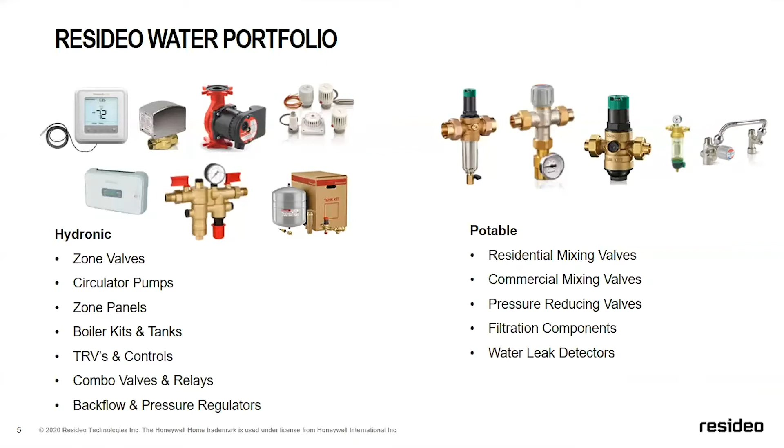We have boiler trim kits, which makes installation of the boilers simplified, TRV controls, and combo valve and relays, boiler feed valves and backflow preventer regulators. And on the potable side of things, we have mixing valves, commercial size mixing valves, pressure reducing valves, filtration components, and water leak detectors. So looking a little bit deeper in our potable portfolio,

At the top you'll see our AM1 series mixing valve, which is a three-way mixing valve that has a patented Teflon coating on it. This helps with longevity, and if you have harder water in your system, this prevents any premature breakdowns. We have an AMX high flow series mixing valve. You will see this on an indirect water heater because they consist of higher flows.

MX commercial style mixing valve, which goes up to 3-inch flanged. You can also use this as a diverting valve in chilled water systems. This also comes prepared with a recirc loop in case you have a recirculation system. UMV 500, which is an undersink mixing valve. This has 3/8 ports. You can either use it as a 4-port mixing valve or a 3-port mixing valve, depending on the situation of your faucet.

And then we have a sediment filter with an optional automatic blowdown option. We have wireless Wi-Fi water leak detectors that come prepared with a 4-foot rope, but you can also extend that rope all the way up to 800 feet. We have a water leak alert that attaches to your water heater, and then we have universal replacement gas valves for OEMs like Bradford White, A.O. Smith, and Rheem.

And up at the top, we also have a mixing valve that is industry known as the tank booster. If you put this on a tank style water heater, you can get potentially 35% more of the tank capacity. This also comes with a pre-tempered port in case you have a washdown station, and a recirc port if you have a recirculation system within the home. And then on the cold side, you have a separate port for either a temperature gauge or a pressure gauge so you can monitor your incoming pressure.

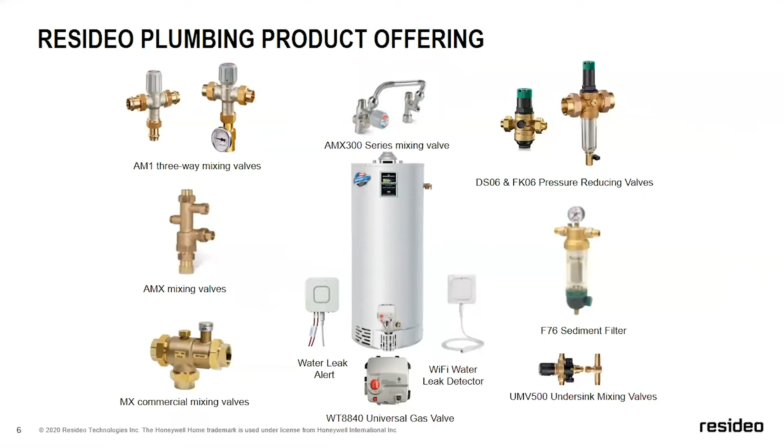And then up at the top, we have our DS06 and our FK06 pressure reducing valves. And that's what we're going to be doing a deep dive on today. So we're going to be talking about the importance of a PRV and the features and benefits of the DS06 and what makes the FK06 special, because it does come with a 50 micron stainless steel filter.

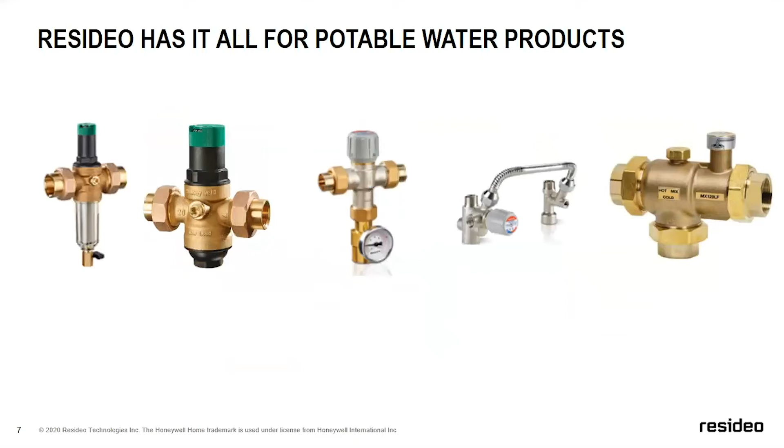So let's start out by talking about what is a pressure reducing valve. A pressure reducing valve simply takes higher water pressure from the street and reduces it down to a manageable, safe pressure to prevent any fixtures like toilets, faucets, laundry machines, and any other potable water fixtures within a house from failing prematurely. If the house street pressure is coming in at 80 psi or above, it is code that you need to install a pressure reducing valve to protect these parts.

And also, if you shut down your faucet and you notice a banging within your water pipes, also known as water hammer, this is a high indication of high water pressure within your home. So I would recommend calling a licensed plumber to either check the PRV that you currently have in line or install one.

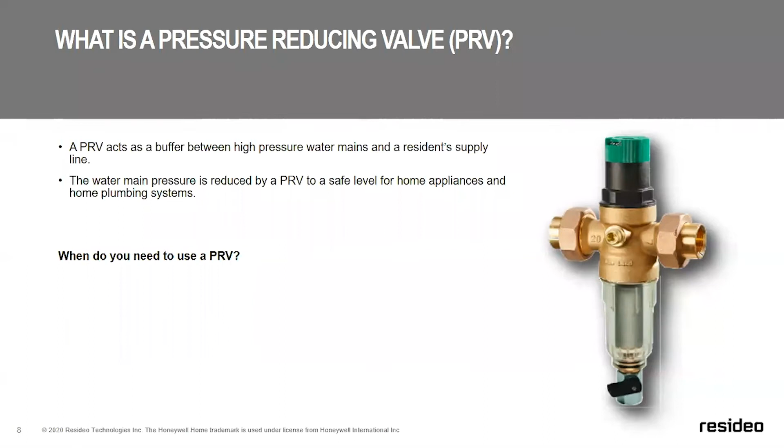So here you see the DS06 and the VF06. The VF06 is our closed loop pressure reducing valve made for hydronic systems. There's a significant difference between the two, starting out with cost. The cost of the DS06 is a little bit higher because of the parts that go into building one of these, and they are also lead free. The rangeability of the DS06 goes between 25 and 90 psi, and the VF06, which is made for boiler systems, goes from 8 to 50 psi.

And then the max input pressure for the DS06 is 250 pounds on the inlet side, and on the VF06 it is a max of 150 pounds. So you can see a significant difference between the two. So if you are looking at a pressure reducing valve on a closed loop boiler system, make sure you're picking the correct pressure reducing valve. And I would also like to note that they both have an output gauge port. They're just in a different location.

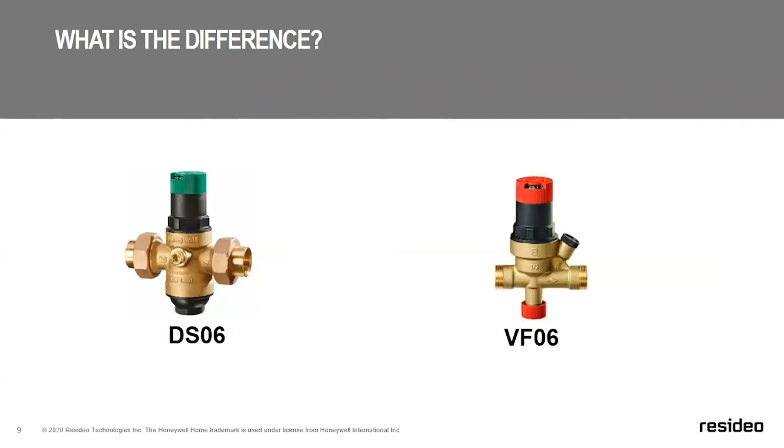So talking about a potable system, what makes high pressure? Well, the higher the elevation of your municipal water tower, the higher the street pressure is. Also, sometimes if your city is above the water table, your municipality will install a pump station so you can get the correct pressure up into your city. Now this can create inconsistencies with your water pressure.

So not only does the DS06 reduce the amount of pressure to make sure it's a safe, manageable operating pressure, it also regulates inconsistent pressure going in. So for example, if you are opening a faucet and then your son or daughter, or whoever else is in the house, opens up a faucet on the other side, and all of a sudden you see a reduction in pressure on that specific faucet, that's a huge swing.

And then also sometimes if you just randomly open up a faucet and you're washing your hands by yourself and you see a significant reduction and no one else is using any other fixtures in the house, that is a clear indication of inconsistent incoming water pressure.

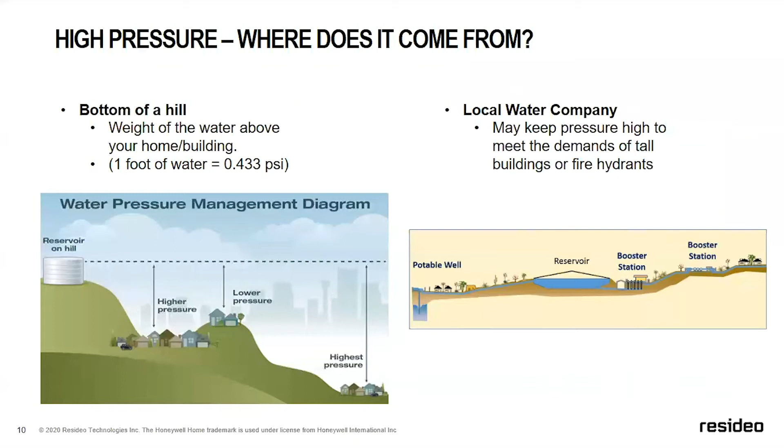So what does our PRV do? Well, like I said before, it takes street pressure, which is high street pressure, 80 psi or above, and inconsistent water pressure, and it reduces it down to a manageable pressure, down to 60 psi. This prevents any kind of premature failures on washing machines, dishwashers, spigots, and any other water fixtures in the house.

So the speed of water flow from the open tap is determined by the amount of pressure in the system at that time. The higher the water pressure, the stronger the water force. Water pressure beyond normal requirements for fixtures and appliances can cause damage. So again, plumbing code does require that you install a PRV if your incoming water pressure meets or exceeds 80 psi.

So we're talking about premature damage on fixtures and other things in that aspect. But I also want to mention that installing a PRV helps to support water conservation. Installing a water PRV could save between 30,000 and 40,000 gallons of water a year. This could equate to hundreds of dollars a year spent in your water usage.

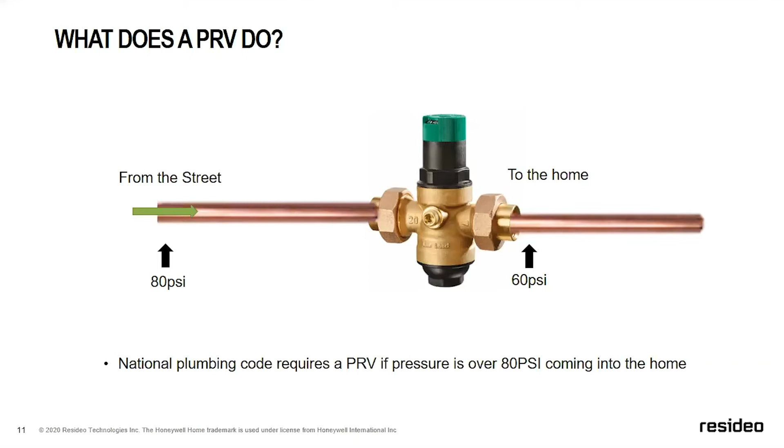So how does that pressure reducing valve work? It's a self-contained pressure reducing valve with a counteracting spring based on the incoming pressure. When you set the desired output pressure, the spring within the bonnet will compress downwards onto a diaphragm cartridge. This restricts the incoming water, slowing it down to a safe, manageable water pressure. And this will also support the amount of water going into the house.

So if you have fixtures that add up to, let's just say, for example, 45 gallons per minute, if you add up all your fixtures, when you reduce that PSI, you are allowing a certain amount of gallons per minute going into the home, and you're supporting water conservation, and you're not overusing the water.

If you have inconsistent water pressure, the spring will automatically compress or decompress, holding the diaphragm in place to maintain the outlet pressure. So that's how the valve actually maintains swings in your incoming pressure, so that when you set that spring, that pressure that you're setting, it will know to move up or down based on the incoming flow.

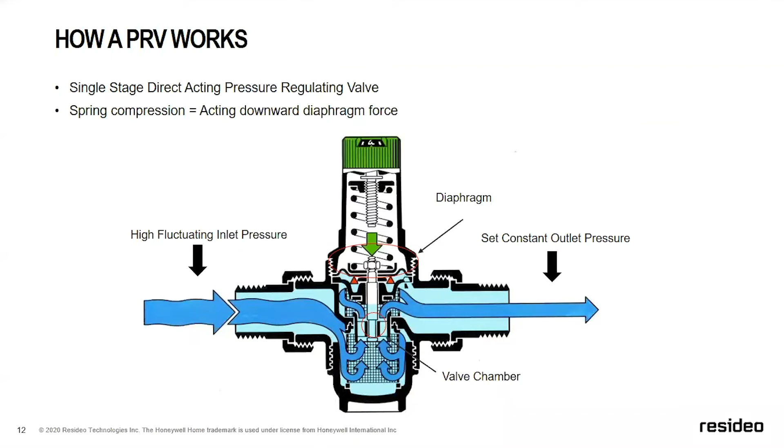So where would you normally see a PRV installed? The installation of a PRV should be after the water main shutoff and after the water meter, but before any fixtures, including mechanical equipment, including a boiler system. However, the irrigation system sometimes could be piped before it, but a lot of times it'll have its own PRV and testable check valve assembly in the case of sudden loss of pressure.

So the DS06 can be installed both vertically and horizontally, but I would also like to point out that we do have a gauge port on either side of it. So if you're using that gauge port, make sure you have access to it so you can read the downstream pressure, or the outgoing pressure of the valve. The FK06, on the other hand, can be installed horizontally. This is because you want maximum filter performance, and you want to make sure you can get to that filter to either blow it down, replace it, or clean it if need be.

So moving on a little bit deeper in the installation orientation. In the instance that an expansion tank is installed on a water heater, please be sure to check that the air pressure within that expansion tank matches the outgoing set pressure of your PRV. Also, check to make sure that a check valve is installed for forcing the thermal expansion from the tank back into the diaphragm of the expansion tank. We do not want that thermal temperature water going back to the DS06 or the FK06.

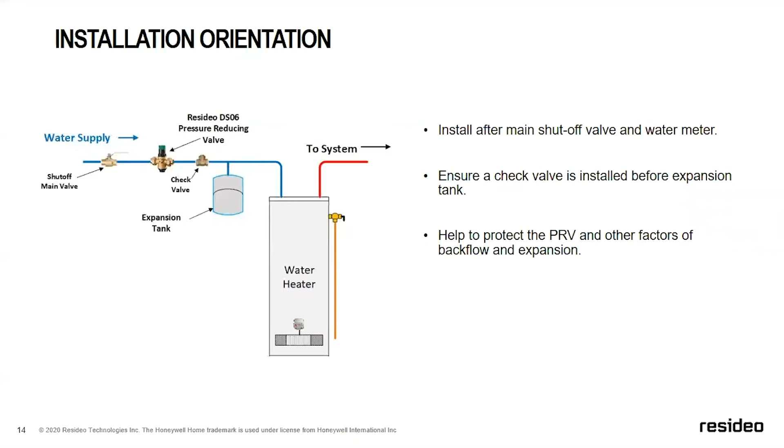So here is our two residential light commercial lineup PRVs. They're both dial set, and they're also easily rebuildable, so you can access the inner workings of this valve in line, assuming that there are isolation valves on either side. And then we also have the FK06 that comes with a unique 50 micron stainless steel filter that can be removed and cleaned, or you could just blow it down if need be.

So looking at this picture here, this is a broken down image of what it takes to build and what's inside of our DS06. And obviously the FK06 is very similar to this other than having the filter at the bottom. So at the top, you'll see the dust cap that comes shipped with the DS06. This is a tamper resistant valve, and this is adding to anybody going in and messing with the actual PRV. So it's a black cap, sits right on top of the dial knob, and then below that is the locking screw.

So this screw is significant because when you are actually commissioning or testing the valve, you're going to want to loosen up that screw, and that will release the dial ring so you can make your adjustments downstream. So when you're done making your adjustments, please tighten up that screw so it locks it in place. So there's two ways you can get this valve to be tamper-free or tamper-resistant.

And then going below that, we have the bonnet, which protects the spindle. And so when you're spinning the adjustment, that spindle makes the adjustments against the spring, pushing down the washer, which is essentially adjusting the cartridge, which is a wet cartridge. So you can see what it takes to build this PRV as strong as it is, and this is a quality product.

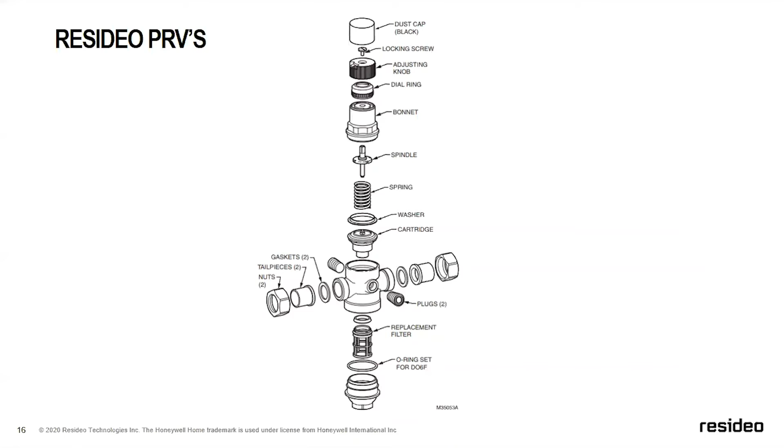So like the DS06 and the FK06, we simplified by taking 14 serviceable parts and building it into one affordable, easy to replace cartridge. So I would always recommend when you're installing one of these, make sure you have isolation valves installed, because you're not going to want to take this out and replace it. You just take the bonnet off, remove that cartridge, and then swap it out. And I would also like to point out that this is a stainless steel cartridge. So again, if you have harder water, this will withstand the conditions.

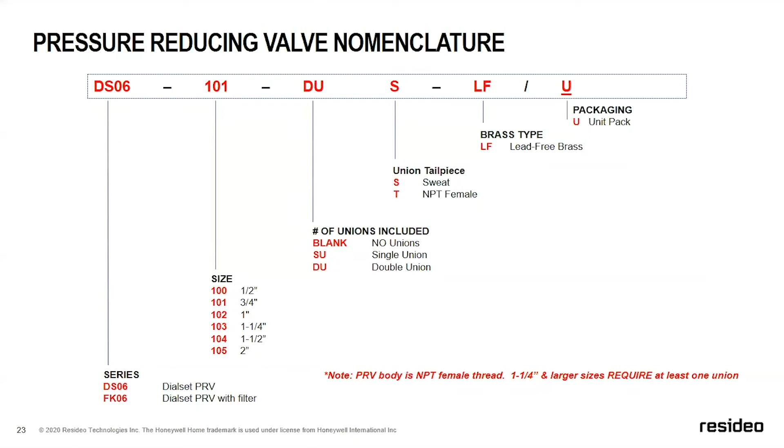And then the last letter is either S or T. S means sweat, and T means NPT female. And then LF is obviously lead free, and then U is unit pack. So here's a snapshot of what the nomenclature looks like for the FK06. Pretty much the same other than the FK, but the size offering is a little bit different, so you might want to make a note of that. We do offer it between 3/4 and 1.25 inches.

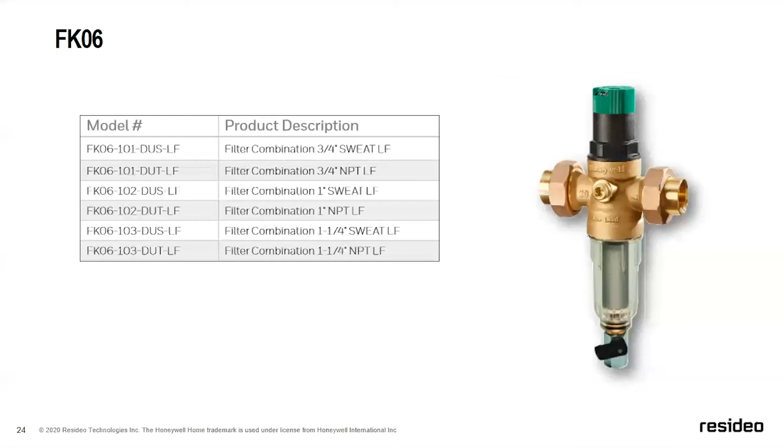Okay, so why use the Resideo PRV? Well, we have an easy to read downstream pressure gauge, so it simplifies setting it up. Traditionally, what you would need to do is put a downstream pressure gauge on either a hose bib or a laundry sink to test or commission, whereas all we need to do is loosen up the screw on the top, set that number to whatever the desired downstream pressure is, screw that screw back down, and then you're all set. So the adjustment is very simple.

We have a 1/4 inch NPT downstream pressure port on either side of the valve. So once you install that pressure gauge, you can easily monitor the operation of this valve. So let's say you get a call from your homeowner that says, I have either water hammer, I have inconsistent water pressure, or anything that could be a nuisance call. You go to the call, you already have your pressure gauge there. You don't have to add a hose gauge on your hose bib. It's right there for you. So simplified service, simplified testing, and simplified setup.

But then also, assuming that there's isolation valves installed on either side of the valve, you don't actually have to take the valve out to rebuild it. You can access all the cartridges, the springs, and all the serviceable items from the top, and then you can also get the filter from the bottom. And I also like to say that you can upgrade the DS06 to an FK06 by removing that bottom cup and then putting in the filter bowl assembly on the bottom. So that's a really nice feature for service guys that have service contracts for customers that have a lot of dirt and silt within their water line.

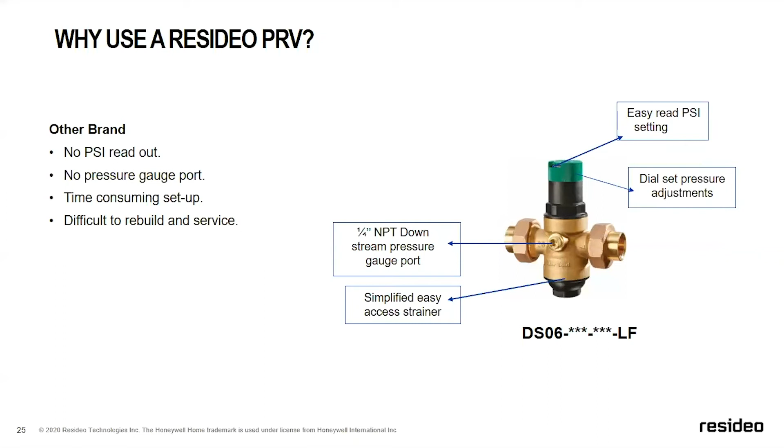And again, what makes the DS06 or rather the FK06 special? Well, again, the stainless steel filter, you can add it to a DS06. This adds protection to tankless water heaters, faucet aerators, water heaters. It'll prevent that silt buildup on the bottom of the water heater and other water components that could be affected by heavy dirt and debris.

And there's a blowdown option on the filter kit, and also you can remove it and clean it. So it's a really nice upgraded version of the DS06 that has all the same features and benefits, just some added features. As an old service tech, I look at this as a great opportunity to upsell some good features to a homeowner.

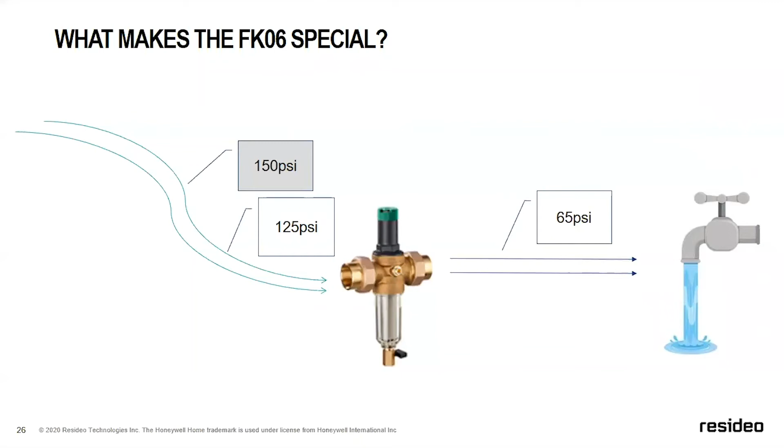So let's move on to sizing your PRV. I would always urge you to never line size a PRV. So when a home is built, the PRV and incoming water line is sized for that specific condition. So when you're going to a service call, be sure to ask the homeowner or building manager if any changes or updates have been made to the dwelling.

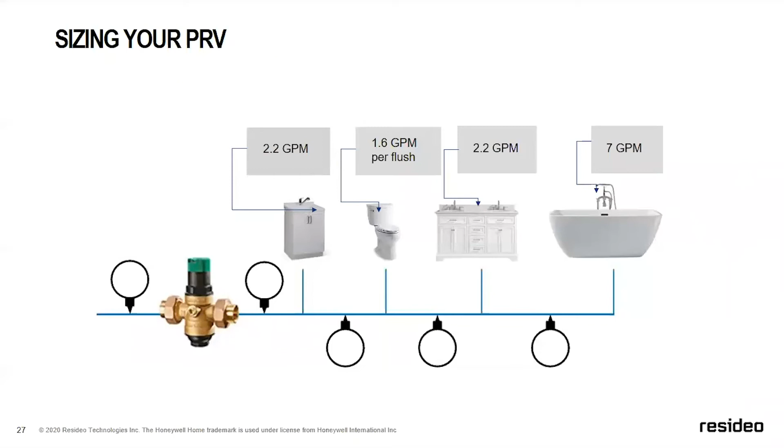In-home water conditions could change if a bathroom is added or a hose bib is installed, or if you do any kind of low flow toilets or anything for that matter; a lot of those gallons per minute and your pressure requirements could change. So make sure you are looking at every condition you have when you're going into a home.

So this is a little chart you can use to help with sizing your PRV. This portrays the fall-off pressure. The fall-off pressure is a reduction of pressure at the outlet of a pressure reducing valve when downstream fixtures are open to allow flow through the PRV. If, for example, the PRV is set for 70 psi, that is the static pressure setting and represents the PRV downstream pressure in a no-flow condition.

As soon as the fixture starts to open, water begins to flow through the PRV and the downstream pressure will fall. More open fixtures mean more flow through the PRV, resulting in more fall-off pressure. The amount of fall-off pressure depends on inlet water pressure of the PRV, the size and design of the PRV, and flow rate through the valve. So again, sum of all fixtures. When you're sizing your PRV, take the sum of all of your fixtures, the gallons per minute, the required pressure, and make sure you're looking at the fall-off pressure.

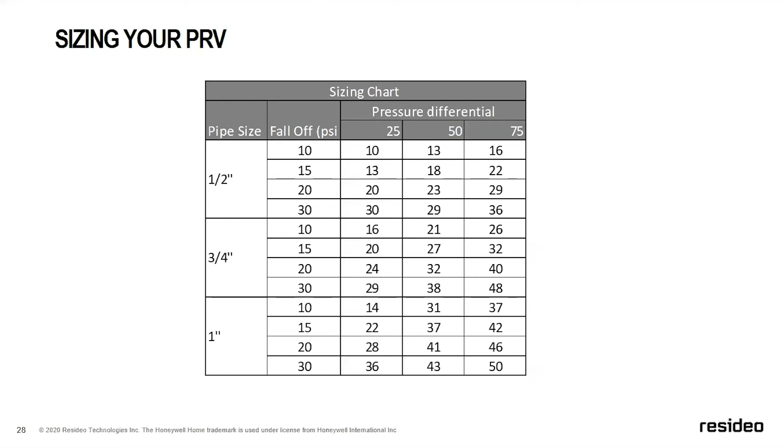So testing and commissioning a valve. This is important, and this is also recommended annually to prevent any kind of premature failure or damage. Assuming you don't have a 1/4-inch NPT gauge on it, install an MGHT, which is a male garden hose thread gauge, at a utility sink or an outdoor hose bib, or you could just install the 1/4-inch NPT pressure gauge on the DS06 or the FK06. Make sure your testing point is downstream of the installed PRV and make sure that that hose bib is open.

Once you open that bib, look at the pressure gauge and make sure it stops at the PRV set point. So if you have your downstream pressure set at 45, make sure that your gauge reads 45. If the pressure set point matches, open up another faucet within the dwelling and make sure that the gauge does not drop significantly. Now, if it drops and it equalizes, that means that valve is operating correctly. But if it drops and it stays down below plus or minus 4 psi, you're going to want to repair or replace that valve.

Now, if you get a call that your valve is either chattering or squealing while it's in operation, before you do these tests, I would isolate the valve to make sure that any internal screens are free and clear.

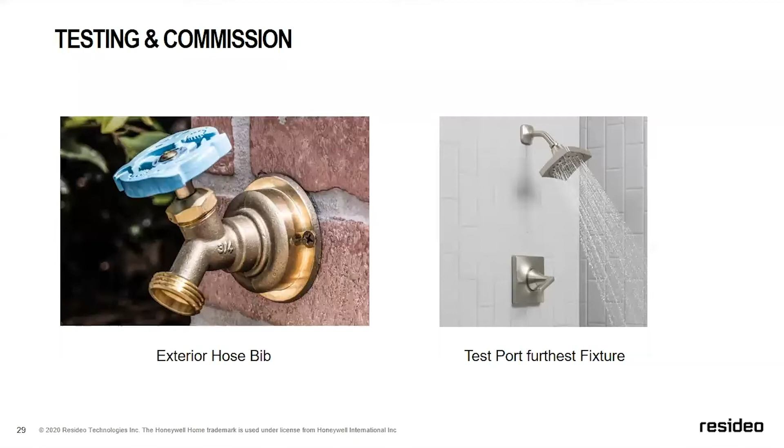So the tools you're going to need to test and commission. You're going to need a 0 to 300 psi or a 200 psi MGHT, which is a male garden hose thread gauge. You're going to need an open end wrench or a crescent wrench. You're going to need an 8-in-1 screwdriver and a 6mm Allen wrench. I would urge you to not use a pair of channel locks on the plastic that's on top of the bonnet. Although it's a high pressure, well-built plastic, channel locks can be a little abrasive at times, and you don't want to leave any marks and have the homeowner ask any questions about it.

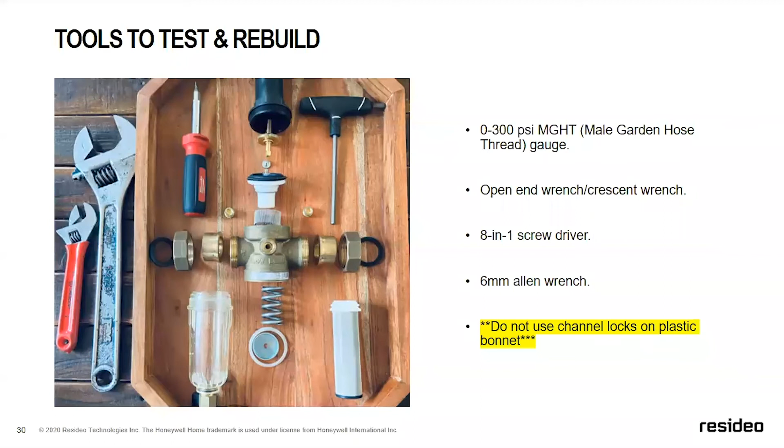You have the 2728, which is simply a rubber gasket, or the KF06 if you want to either replace the actual bowl for the FK06 or upgrade the DS06. And then you have the AS06, which is the stainless steel screen. If you want more details about this, I would refer to page 14 in the Honeywell Home Resideo Whole Home Water Solutions catalog. Or you can always reach out to your local rep or distributor.

So we also offer a jumper kit. In the case of a new construction application, this jumper kit allows you to install on the rough portion of the project. So you install this. This matches the face-to-face dimension of a body-only DS06. It does come with a screen, so if you do have a lot of copper debris or dirt or anything like that, it will protect the house during the construction phase of the dwelling.

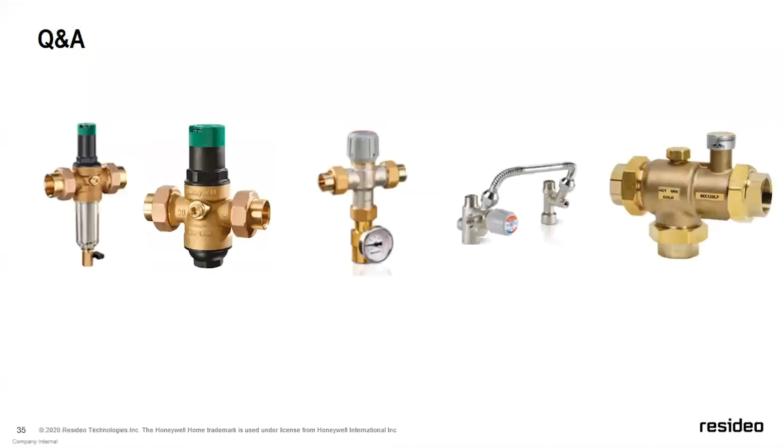And really all you need to do is isolate the valve, drain the outgoing side in the house, the water out of there, so you're not fighting with a drip. And then you take that black cap off the bottom of the DS06, and then you just simply put in the screen and then thread on that plastic bowl. That's also a gasketed bowl, so you don't need any Teflon or pipe dope for that matter. So it's a really, really simple upgrade, and I can tell you it is very inexpensive. Yep. Good answer. I think the takeaway on that is very simple. Parts are available, and it is a great upsell opportunity, right?

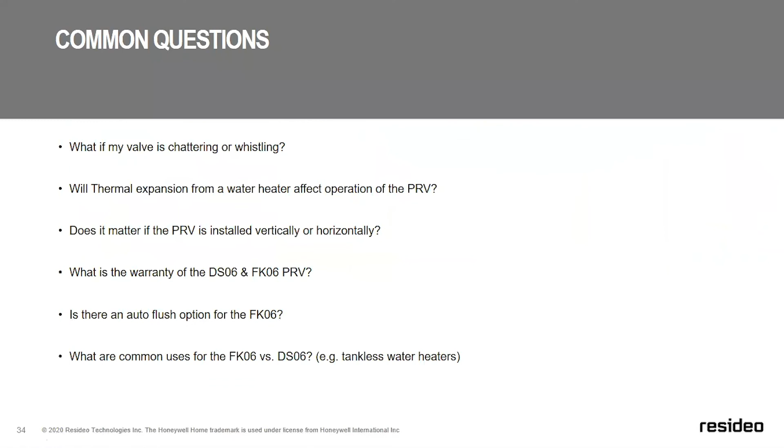Excellent. All right, got a question here from Ryan. Says, is the D15S available now? And actually, Chris, I'll take that question. So the D15S, which in review was that blue larger size PRV, is generally used in the markets down in the Southwest. You'll see them just running down the road, you'll see the pipes coming out of the ground. You'll see a product like that in addition to multifamily, et cetera.

We've made that product for a number of years in our factory in Mosbach, and it's well apparent in Europe. I currently have a project underway for this and it will be available in our Americas portfolio likely by the end of the year. Right now we're running through testing and certification, and I see no issues why it won't be here by the end of the year. So it'll be a good addition to our portfolio coming very soon.

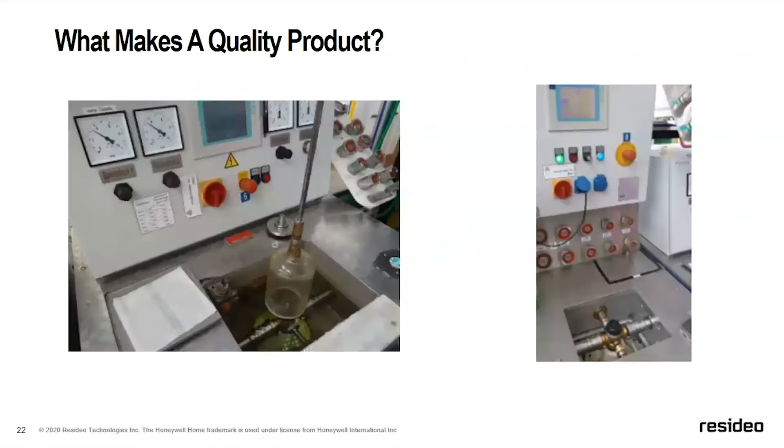All right. I actually can't wait for that to come out, Sam. I got the opportunity to have that valve in my possession for a while to do some research, and that is a very heavy duty valve in quality for sure. So I'm excited about that myself. You bet. I'm excited to bring it on for us too.

Next question I have from Kelly. Service contracts. I use them very often in my business, and I've never thought to have a PRV in one. What has been your success rate on that? And can you get into a little more of what I would include in the service contract for a PRV? So from a personal perspective, we actually did a whole home plumbing inspection. We would first start out with the pressure. We would check the pressure at the house to make sure that it is running at a safe, manageable PSI. So right then and there, you could check that off the list.

We would always check what kind of fixtures they had and how many fixtures they had in the house to ensure that the water line coming into the house was sized correctly. We would see what kind of toilets they had, whether an upgraded low flow water conservation style toilet or an old high flow toilet, and just get a gathering of what the home is. Is it plumbed with copper? CPVC, PEX, or anything like that? So we would have an initial full-on checklist, a 36-point inspection, and then an annual touch just to make sure that everything is maintained.

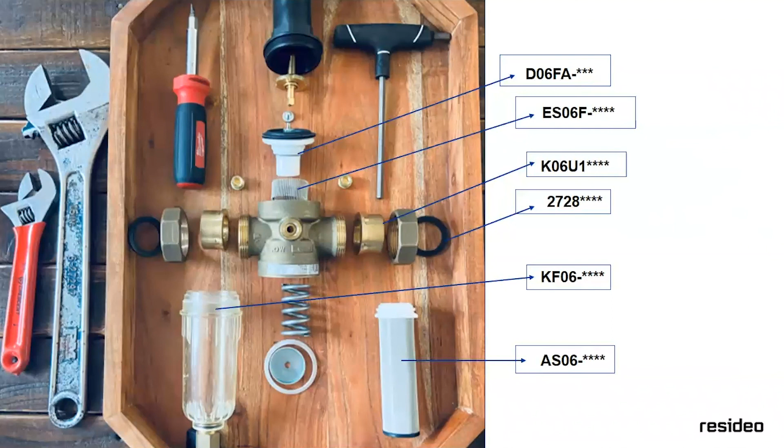We also have them in different sizes, right? So you'd want to make sure you have the right SKU. I believe there's 2 different ones for the KF, there's 2 different ones for the AS. Make sure you got the right size and you're in business for that. Yeah, and again, I'd like to add, if you want to get in the dirty details on what those sizes are, it's on page 14 of our water catalog. Good. Thank you both.